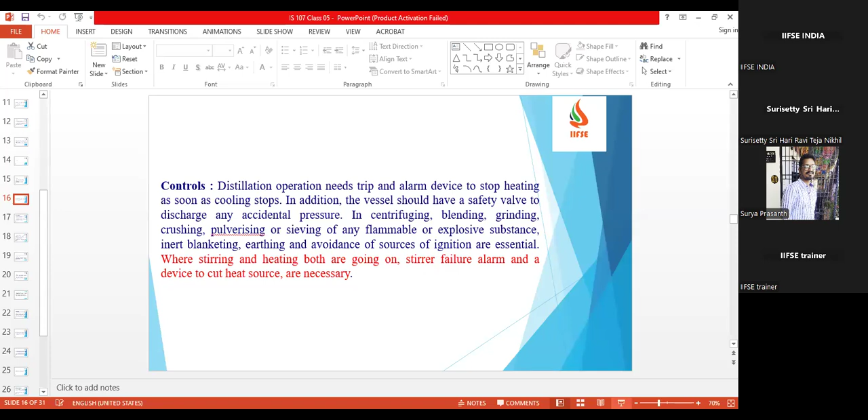Okay, let's get into the topic. Yeah, we were discussing about the controls; in between we lost the time. So again, we'll start from here. Okay, controls. Controls means what? Basically, there are systems in place to manage the unwanted events or unintended events or situations, to maintain the safety controls or safety systems in proper working order.

So here the thing is, for the distillation, as I gave an example of the petrochemical, the distillation operations need trip and also alarm devices to stop the heating as soon as cooling stops. Cooling stops in the sense, if the cooling circuit or the cooling system is inactive, immediately the alarm should activate and inform the specific equipment operator or distillation operator so that he will act accordingly to avoid accidents.

In addition, the vessel should have safety valves to discharge any accidental pressure. In centrifuging, blending, grinding, crushing, pulverizing, and also the sieving of flammable or explosive substances, inert blanketing...

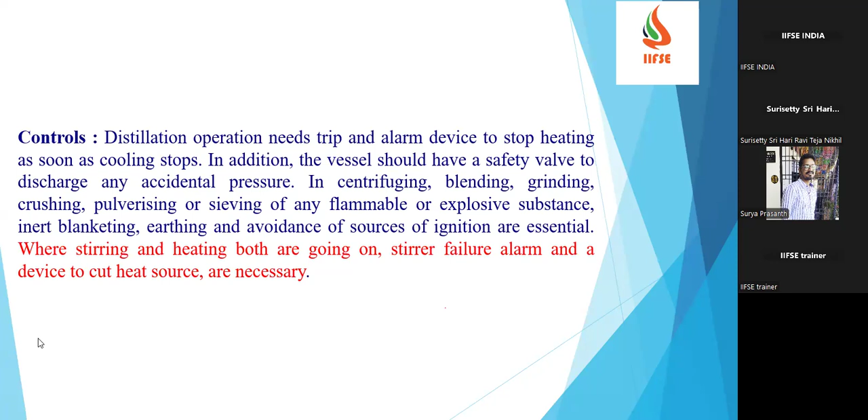Then other processes and operations: you have absorption of gases. These are the other such processes we can see. The solution of gases in liquids, or absorption of gases by solids through the whole body; it is a penetration or consumption of a substance, as in scrubbing systems. And adsorption, it is an adherence of substances on a surface; the substance that adsorbs is the adsorbent, and that which is adsorbed is the adsorbate.

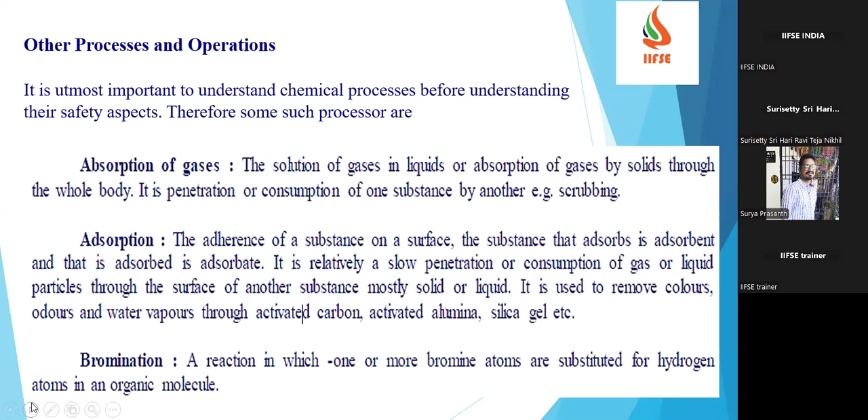It is a relatively slow penetration and consumption of gas or liquid particles through the surface of other substances, mostly a solid or liquid. It is used to remove colors, odor or water vapors through activated carbon, activated alumina, silica gel, etc. And bromination, this is also one of the processes, a reaction in which one or more bromine atoms are substituted for the hydrogen atoms in an organic molecule.

And catalysis and the catalyst, where you have an alteration of the rate of a chemical reaction by the introduction of substances that remain unchanged at the end of the reaction. Small quantities of catalyst are usually sufficient to bring about the increase in the rate. So here what will happen? The catalyst will increase the reaction rate, but it is not involved in the chemical reaction. It will only increase the rate of reaction. It will speed up the process; it acts as a booster to the reaction.

Then chain reaction: any self-sustaining molecular or nuclear reaction, the products of which contribute to the propagation of the reaction. Then decomposition: it is about the breaking up of chemical compounds under various influences, by chemical action, heat, electric current or biological agents, biodegradation.

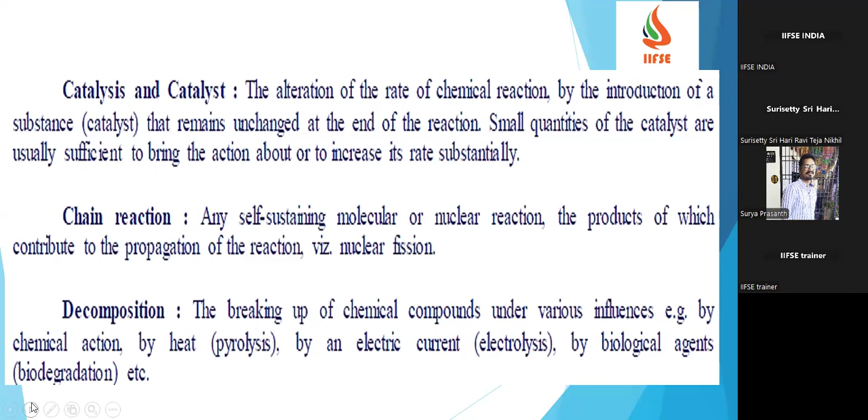And distillation, the process of converting liquids to vapors. This is the most common process used in all petrochemical as well as some other industries to extract materials from raw liquids. Condensing the vapor and collecting the liquid or distillate, it is used for separating mixtures of liquids with different boiling points, or for separating a pure liquid from a non-volatile constituent.

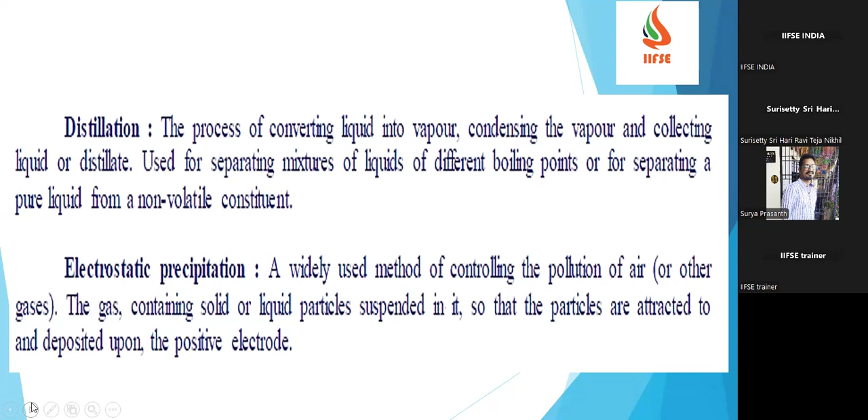And electrostatic precipitation, it is a widely used method for controlling air pollution. It is used in the ducts to collect the dust particles from the exhaust gas containing suspended solid or liquid particles, and the particles are attracted to and deposited upon the positive electrodes.

Then endothermic process, a process of absorption of the heat. It is exothermic and endothermic. And evaporation is nothing but the conversion of liquid to the vapors without necessarily reaching the boiling point. So this is also one of the activities. Whenever the liquid reaches its boiling point, it starts evaporating. But in certain conditions, without reaching that also, evaporation takes place.

Then exothermic process, a process in which energy in the form of heat is released. And extraction, the process of separating a desired constituent from a mixture by means of selective solubility in the appropriate solvent, also used to describe any process by which a pure metal is obtained from an ore. Extraction is nothing but segregating a mix of materials selectively.

For example, I can say petrol is also an example. The word extraction I use apart from distillation. So from the crude oil we are extracting petrol, diesel, kerosene, tar, petroleum coke, etc.

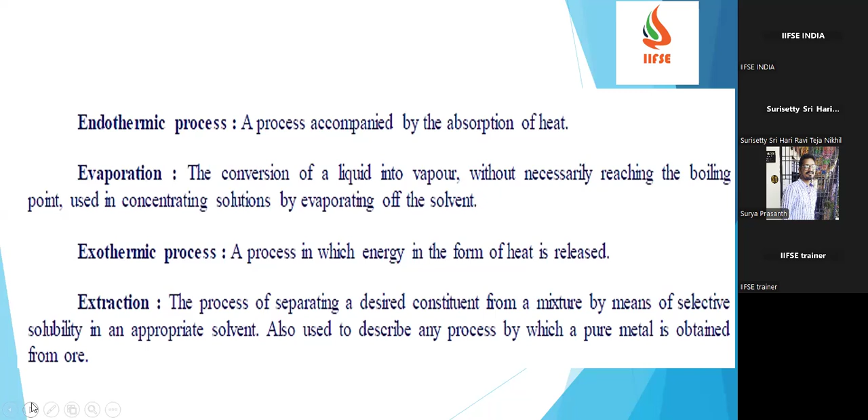And fermentation, this is also one of the processes where the chemical change is brought about in organic substances by living organisms like yeast and bacteria. Fermentation is like our traditional practice to prepare curd. That is also a fermentation process.

And a fractionation column, a long vertical column containing rings, plates and bubble caps, attached to the still; as a result of internal reflux, gradual separation takes place between the high and low boiling fractions. It is about controlling the flow of the liquid. Then freezing, the change from the liquid state to solid. It is freezing of chemicals from liquids into solids.

Then fumigation, the destruction of bacteria, insects and other pests by exposure to poisonous gas. In COVID, we have done so much fumigation in our facilities to control bacteria, viruses, etc. Then hydrogenation, subjecting to the chemical action of hydrogen, causing it to combine with hydrogen, and leaching, washing out soluble constituents.

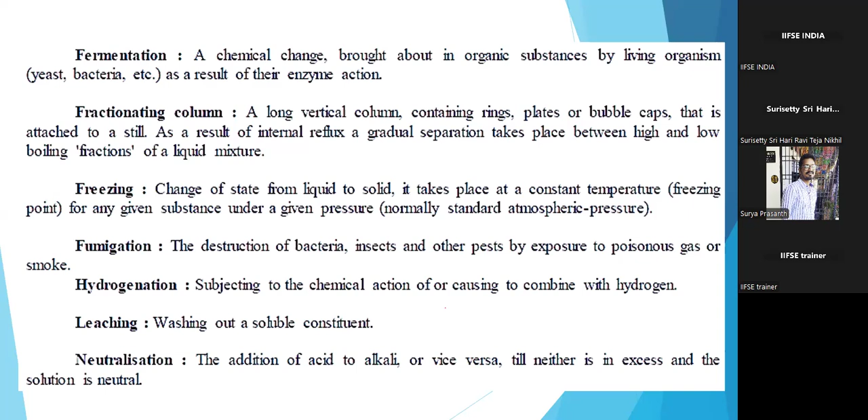Then neutralization, the addition of acid to alkali, or vice versa, till neither is in excess and the solution is neutral. Neutralization is, for example, reducing the concentration of the chemicals in the solution. Okay, that is about the various other processes we should know.

Then exothermic reactions. In detail, if heat is given out as the reaction proceeds and this release of heat raises the temperature, approximately for every 10-degree rise in temperature, the reaction rate doubles. So whenever the temperature of the chemical increases 10 degrees, the reaction rate doubles.

Thus the reaction proceeds faster and still more heat is given out, and this chain makes the reaction uncontrollable unless adequate arrangements for removing the heat or pressure are provided in the reaction vessel, and the reaction rate is gradually increased so that the reaction does not reach the runaway stage. We should have proper controls in place for removing heat or pressure in the vessels so that we can avoid runaway, an uncontrollable reaction.

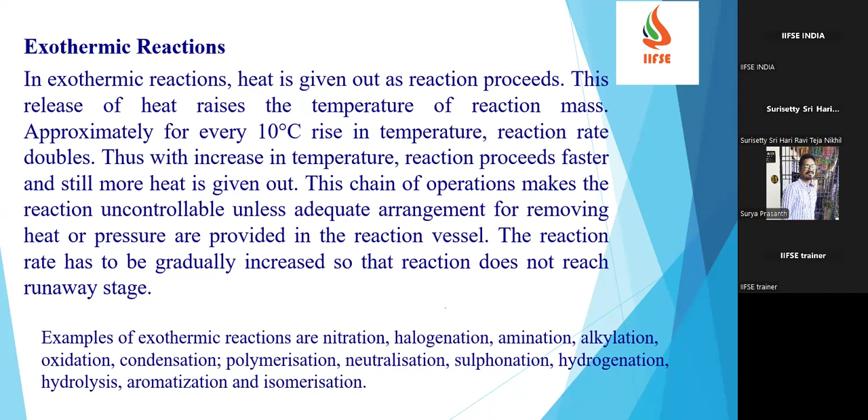Now, vessels for such reactions should be regularly tested by competent persons. In pharmaceutical industries they test all these glass-lined vessels and reactors; they check the glass lining, which is used basically for acidic reactions, and look for any pitting or cracks inside the vessel and also wear and tear.

And for highly exothermic reactions, since the temperature is increased very gradually, automatic programs are provided which maintain the predetermined rate of rise in temperature, and thus prevent the reaction from reaching runaway. In addition to a safety valve, a rupture disc with drowning, i.e. dump or surge vessel is provided to receive the entire reaction mass in case of any over pressure and bursting of the rupture disc.

And the pressure gauge, temperature gauge, high pressure temperature alarm, heat source or cutoff devices, quenching or process killing devices, safety valve, rupture disc, drowning tank, cooling devices, agitator, feed controls and pressure controller, drain valve should be regularly checked and properly maintained, and alternative water, power, and also pumps are required to maintain the necessary cooling systems. So these are the various controls.

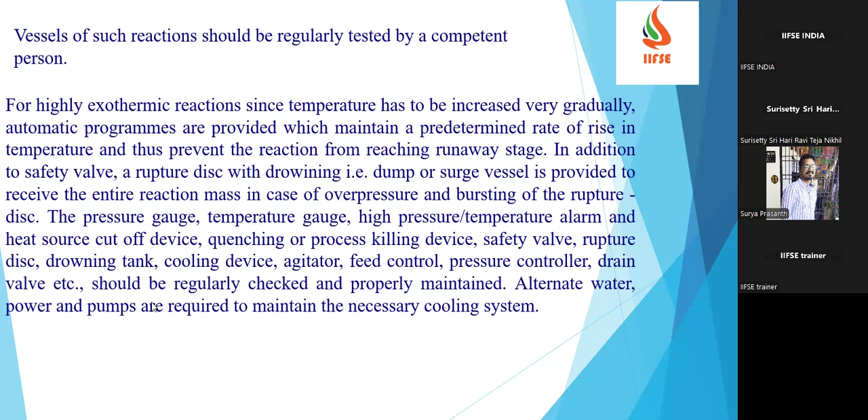The pressure and vacuum reactions. So any vessel maintained at a pressure above 1 atmosphere is a pressure vessel. Any vessel which is working above atmospheric pressure is called a pressure vessel.

A suitable means of pressure release such as a safety valve or a rupture disc should be provided, and the gases released from the safety valve, if poisonous, should be scrubbed before venting to the atmosphere, and flammable gases should be safely contained and cooled, and emphasis should be laid on the proper design, maintenance and testing of the pressure vessels, and their thickness should be periodically checked for corrosion or pitting.

So a rupture disc is also one of the safety devices which is used. It is circular in shape. I'm not able to... It is circular in shape. It will open on one side; it is one-directional flow. So this is how it is connected in between the pipelines. This side also you have a pipeline. It also acts as a safety relief valve. The flow is this way. So once it opens, the reaction will go this side. Okay.

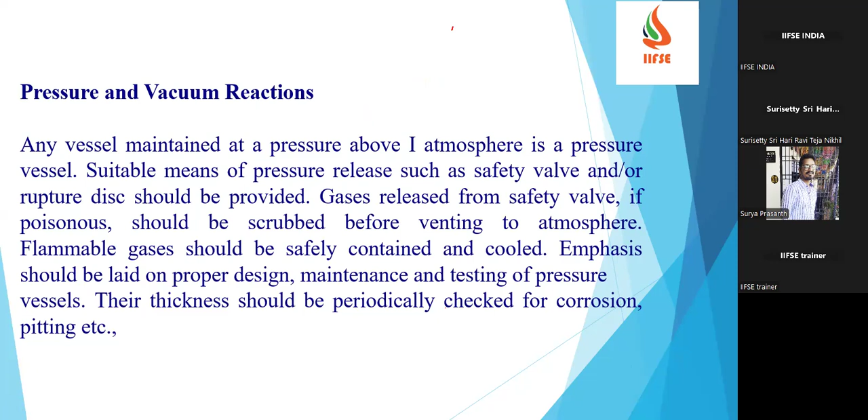And then the poisonous gases should be scrubbed before venting, and the emphasis should be laid on the proper design, maintenance and testing of these pressure vessels. That's why all the pressure vessels have to be inspected by the competent person once in 6 months, if I'm not wrong, and internally once in 12 months. Then pressure vessels should be designed as per the standard, which is IS 2825. It is a very useful standard. You can get this as open source; you can search in Google and you'll get this.

Tested by the competent person. In solvent vacuum distillation, if the vacuum breaks, outside air can enter and make an explosive air mixture in the vessels. This may cause a fire and explosion. To avoid this, vacuum failure alarms and also inert gas purging are necessary. So whenever any leakage happens with this vessel, the outside air can enter inside and form a flammable mixture, resulting in a fire or explosion. So we should be ready with the purging mechanism so that we can avoid accidents.

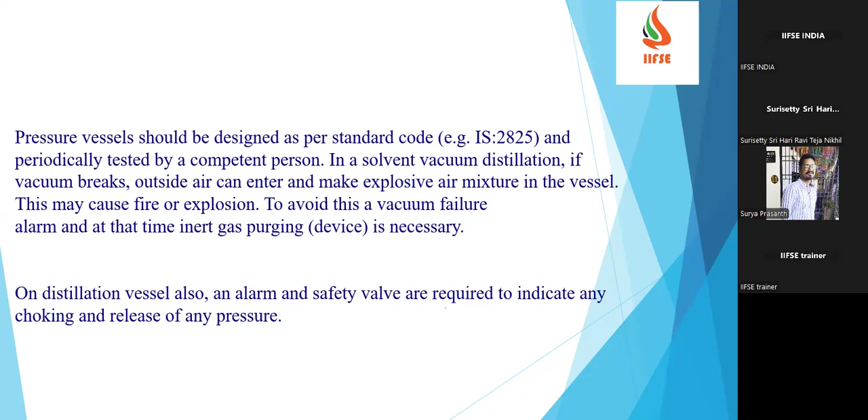On distillation vessels also, alarms and safety valves are required to indicate any choking or release of pressure. Sometimes in distillation columns, choking happens. Choking means obstruction in the flow of the material. So in such cases also, we should get an indication about the choking.

Then flammable and explosive reactions. Utmost care should be taken during the storage, transportation, handling, and reaction of explosive or flammable materials. Bulk storage of these chemicals comes under the purview of the Chief Controller of Explosives, and free fall of flammable liquids should be avoided, and suitable dip pipes should be provided. A dip pipe, as we already discussed in the static electricity topic, is a pipe very close to the bottom of the vessel, so the liquid will not free fall from the top, so that we can avoid static electricity.

All the lines carrying flammable materials must be bonded by copper clamps and also earthed. Continuity should be periodically checked, and the resistance to earth shall be less than 1 ohm. The pumps handling these chemicals should have a brass or non-metal impeller to avoid sparks due to friction. Flow velocity should not exceed 6 meters per second in the pipeline

to avoid static charge accumulation. Reactions of flammable chemicals, including solvent distillation, should be carried out at low pressure, under vacuum or inert blanketing. Even on distillation vessels, a safety valve or explosion vent should be provided to take care of any accidental pressure, or a flare, condenser, vent gas condenser, or incinerator should be provided if required.

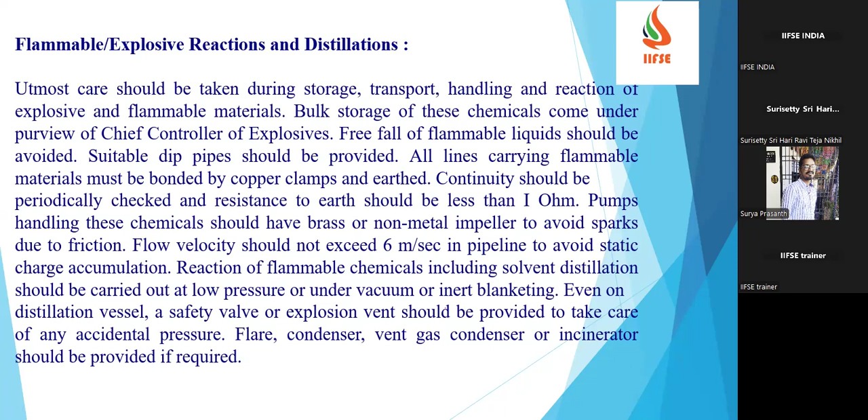So in case any leakage happens, if it is a toxic substance, we can use scrubbers. If it is a flammable substance, we have to use either a flare, condenser, or incinerator, because these flammable gases will not dissolve in water. So those flammable gases must be burned off to make them neutral.

Then toxic reactions. For handling acid, alkali, or other toxic chemicals, the workers must be provided with suitable protective gear, which is nothing but PPEs like PVC gloves, gumboots, safety goggles, apron, etc. And suitable posters showing the dangerous properties of these chemicals and the safe working procedure

should be prominently displayed, and arrangements for combating spills of these chemicals, such as a water shower pipe for covering up, should be available nearby. Also the worker should be trained in the use of chemical safety equipment before giving any responsible job. Adequate suitable scrubbers, absorbers, and neutralizers for inorganic gases or vapors, and the condenser for

organic vapors should be provided and also well maintained. Whenever we say flammable or explosive mixtures or leakages, there we have incinerators or flares. Whenever we deal with toxic reactions, we talk about scrubbers and absorbers.

Now we'll see about the emergency shutdown. We have seen the various processes and the hazards with respect to those processes. Now we'll try to understand the emergency shutdown: in case any emergency happens, how we can shut down this activity. Because of operational deviations, as discussed above, or failure of safety and control devices, when an emergency arises, the situation seems to be out of control, and we should have controls in place.

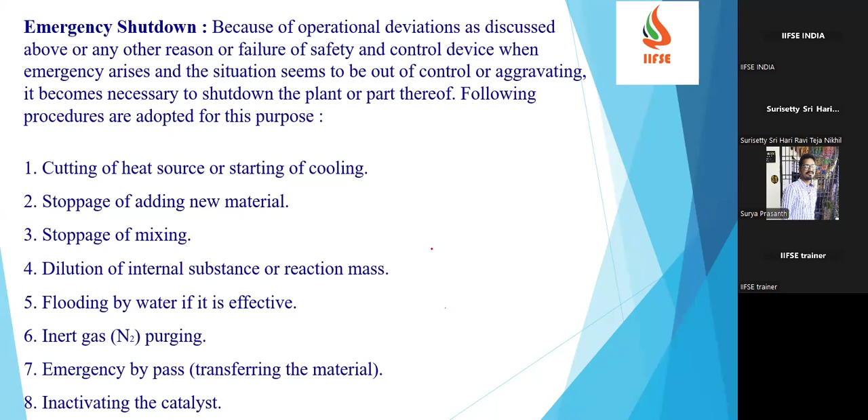An emergency bypass, transferring the materials, and inactivating the catalyst. These are the various shutdown controls that should be in place while working with these kinds of processes or operations. And use of vessels, equipment, and control room.

Many vessels and equipment are used in chemical processes: storage vessels, reactors, distillation vessels, transfer vessels, holding vessels, measuring vessels, open and closed vessels, a variety of pipelines, etc. Their material and MOC should be studied. MOC means material of construction, meaning what any equipment is made out of.

For example, some are made out of steel, fiber, HDPE, or other plastics, etc. So the MOC should be studied from the safety point of view, and they should be used in an enclosed manner as far as possible. Acids, alkalis, solvents, and dangerous chemicals should not be handled in open buckets or containers.

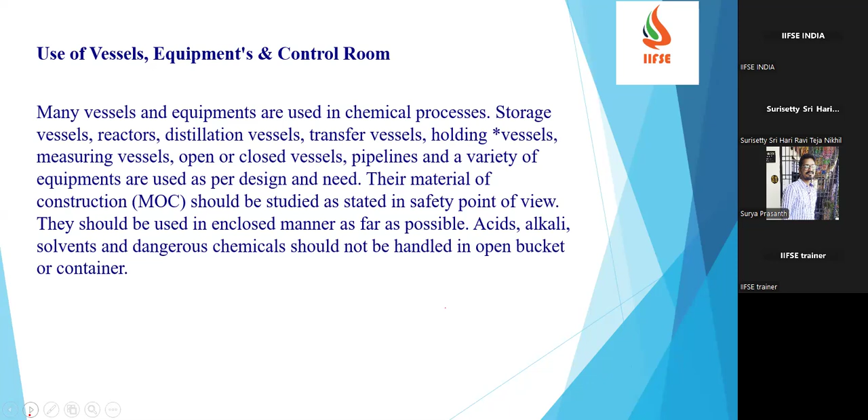So these kinds of chemicals should be handled in closed containers because they are toxic in nature. Once it is out, people will get affected by those gases. Okay.